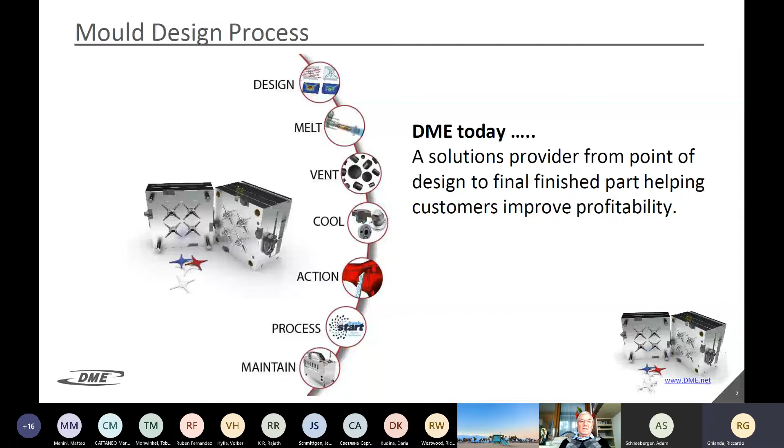So first of all, DME today, who are we? We are a solutions provider whose goal is to accompany the customer all throughout the production process. We start by helping the customer in the design phase, then through the production and assembly of the mold, and mainly thanks to this machine that I will talk to you about at the end, we are also together with our customers during production and during maintenance of the molds.

So why is cooling an opportunity? Why do we think it is such an important opportunity? It is because the cooling stage, as you can see in the diagram here, is the most important and the longest portion of the production process. In this diagram, you can see it can be up to 50% of the total cycle time, sometimes even more. This means that any improvement on this part of the process can have a major impact on the overall production output.

How can we generate an improvement in the output? It can be thanks to an improvement in the cooling stage, in the production of the cooling lines, ending up in a reduction of the part weight or a reduction of the scrap rates, which generally means a higher quality of the part, because the level of performance in cooling has a direct impact on the quality of the plastic part. Or it can save time.

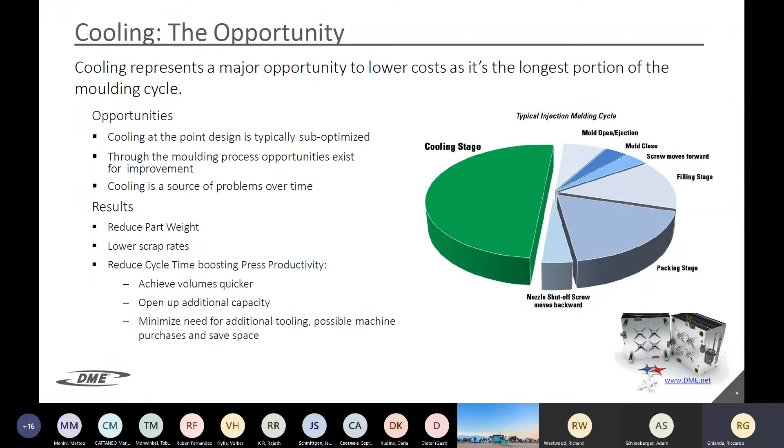So you can either achieve volumes quicker, saving more time, which ends up in higher productivity. You can open up additional capacity, because that time you save can be dedicated to other productions, which is vital for injection molders. And you can have a reduced need for additional tooling, because to get to the same production level you need less tooling—maybe just one mold, or two molds instead of three, for example.

What is the DME approach? We want to help the customer at the design phase, and here we can help with our engineering, with our support to customers. You see mention here of analysis, because we can help customers with mold flow analysis. We can offer this service, and then thanks to our cooling technology.

Here is basically our products: the standard components, performance baffles, conformal cooling—just three examples. But then we can also help the customer once the mold is produced and in production, thanks to products like SmartFlow and Tracer VM to control the production, thanks to Cooling Care for the best performance and maintenance of the mold, and other products for control like the M-series controller.

As all of us know here on the call, DME is a sister company of Mold-Masters, so we can also sell their controller. This is not going to be in the discussion today, but it was just to give an overview of what we can offer.

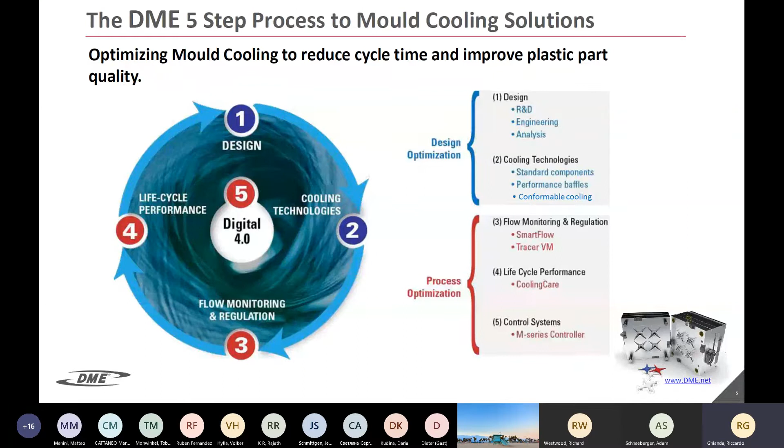So now we go into the products, the complete overview of our solutions. First of all, a lot of pictures—this is exactly the biggest, or easiest, part of our offering: the sockets, the plugs, the nipples, the extension hoses, and the rings. So the easiest products that we have when it comes to cooling.

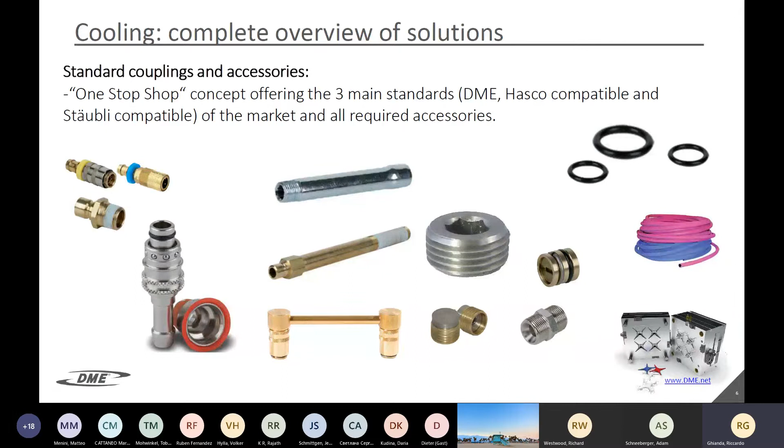What is important about DME is that we are a one-stop shop, because customers can find with us the 3 main standards on the market in Europe, and I would say globally. The main one is the DME standard, our own original accessories. Then we have 2 other families: what we call the Euro, which is Hasco compatible, and Universal, which is Staubli compatible. So basically, a customer can find with us any of the products he might need to build the mold.

Then the second family is the baffles and cascades. These are a little more sophisticated products.

Their goal is to bring the cooling as close as possible to the cavity, still using conventional machining. And I'm saying this as opposed to 3D printing, okay? So still with conventional machining, the customer can bring the cooling as close as possible to the cavity.

We have a wide selection of baffles and cascades, I really think the widest in the industry. Here I summarized with all these pictures how many we have. And because we have so many, we can offer customers ease of installation, because they can choose between all these different options on how to install the baffles or the cascades in the mold.

Then probably the most efficient product is the one on the right, because it has built-in ribs. When the water is flowing on one side of these baffles, it generates a turbulent flow, which means in the end a higher efficiency in cooling. This is very important because of the topic we're talking about today.

And then, because we have so many different products, we can offer customers different inlet and outlet configurations, which results in the end in a higher freedom that we give to the designer when he's still designing the mold. And then the last topic is about the product you can see at the bottom left, which is a modular version. Basically here the customer can put together as many pieces as he needs to suit precisely his application, according to the length that he needs.

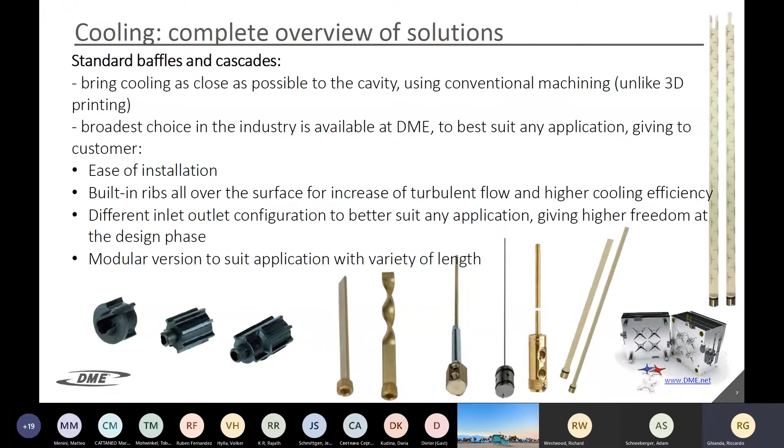Then other very successful products that we have at DME are the standard heat transfer rods. All of these are, of course, standard products. And these bring the cooling efficiency even farther, because you can go even closer to the cavity with this kind of product, and you can reach really the hardest spots. And again, I'm talking about conventional machining. Of course, with 3D printing, you can go beyond, but with conventional machining, this is the top that you can get. They are easy to install, because as you can see, they're all cylinders.

And what's most important about this product is that they have a higher thermal conductivity than copper. So you can go very close to the cavity and bring the highest efficiency in cooling which is possible with standard products.

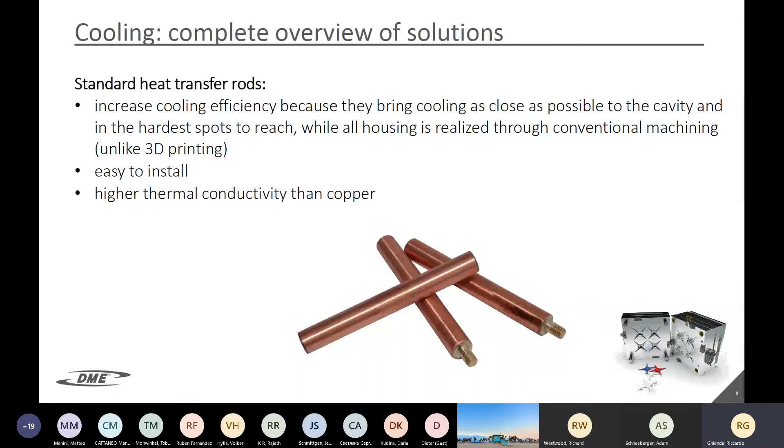Then here we have another important product for us. I put together multi-couplings and the cooling manifold, even though they're different products, because in the end they are both needed to reduce the time dedicated to operations such as the connection and disassembling of the mold when it is going in and out of production. So these products give customers the possibility to save time in all the operations before and after production.

The multi-coupling which you can see at the center is the DME version, so the original DME standard, and the one on the left is the Staubli compatible. Then on the right, you have our cooling manifold. In this case, this is a special product, which we design every time according to the request of the customer, according to which threads and which length he needs. But this picture also represents a range of standard products that we have, like anyone on the market.

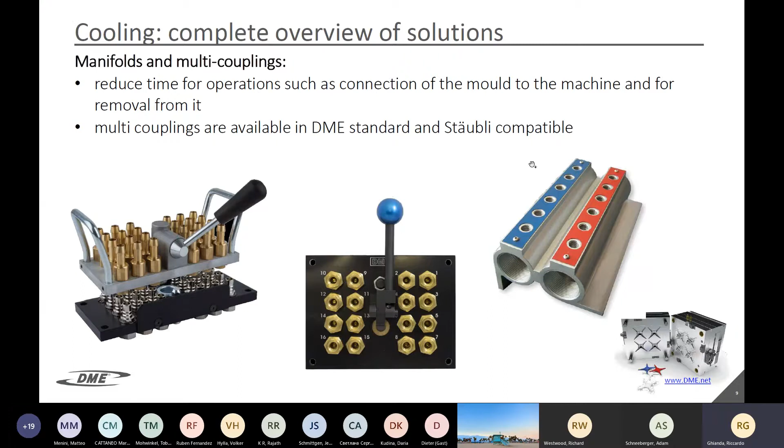Probably the jewel of the crown, when it comes to cooling, is conformal cooling. In this case, as DME, we already had a session. I think most of us participated already on Tuesday, the 20th of October, so this Tuesday. And as Adam was mentioning before, you can find the recording on our LinkedIn page.

I just want to mention to our customers that together with conformal cooling, we can also offer, of course, mold flow analysis, whether it's for an opportunity related to conformal cooling to be installed in a mold or not. So even for conventional cooling, we can manage it.

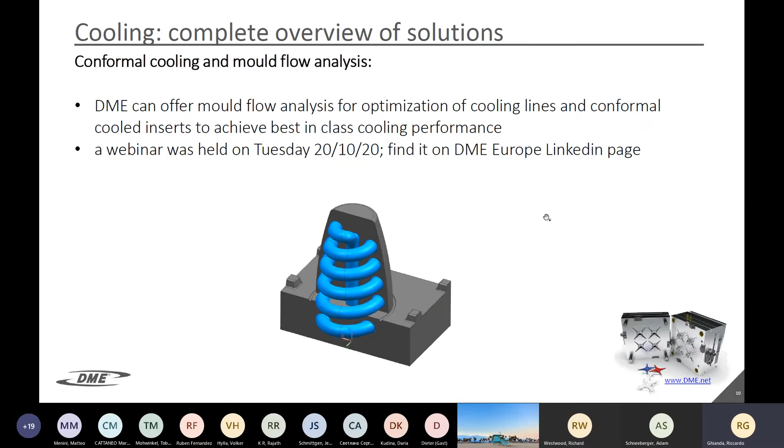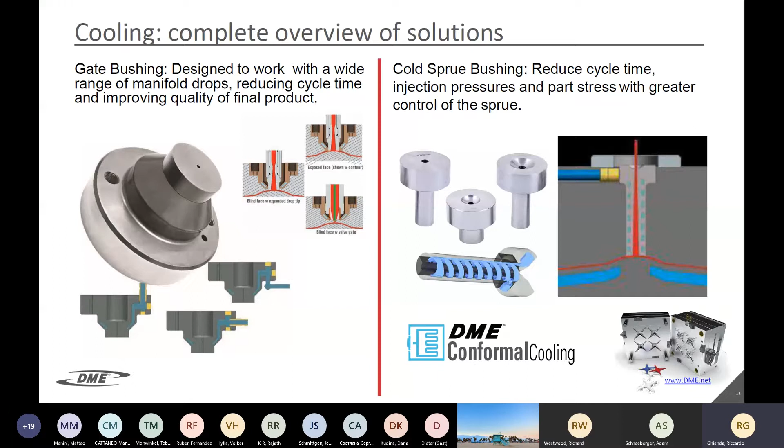So this brings to the customer in the end a reduction of the cycle time and a reduction of the injection pressures, which is very important because it enables many possibilities for the customer, like, for example, depending on the dimension of the mold, even working on a smaller machine, if possible, which means in the end a cost saving, a reduction of the cost for production. And the same products can also bring a reduction of the stress within the plastic part, so in the end, a higher quality of the final product.

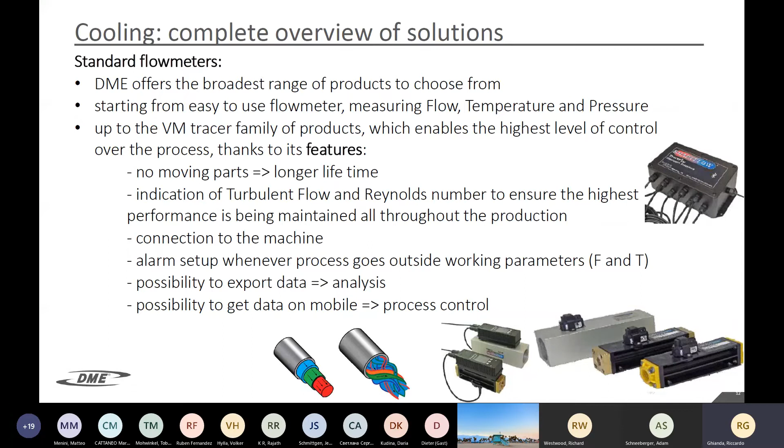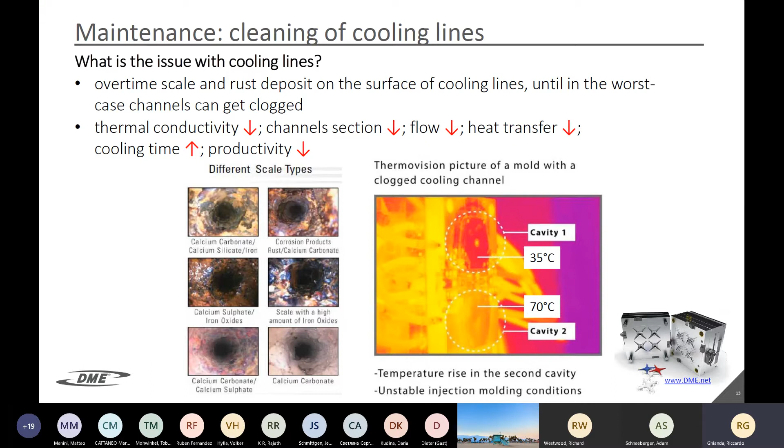As the sum of these 2 effects, the reduction of the section and the thermal conductivity, you have an overall reduction of the heat transfer, which means that to obtain the same level of quality on the part, to be able to eject the plastic part from the mold, you have to use a longer cooling time, which in the end results in a lower productivity. So this is the issue that injection molders are facing.

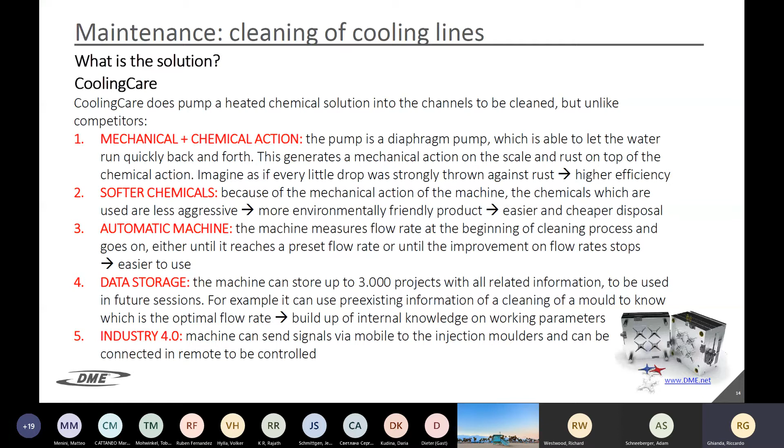And then the last point is about Industry 4.0, which is of course very important and the trend of the moment, because the machine can be linked to the internal system of the customer's injection plant, in order to download all of the data onto the PC, or also via mobile. It can work via mobile because it has a GSM card installed in the machine. So this is why the Cooling Care is so important for us. And then just a few notes about it, because anyway, it's a machine.

DME is available for demonstration, so we can show the customer how the machine works and how efficient it is. And of course, we provide training. Once the machine is sold to the customer, we provide training on site. On the other hand, if a customer for any reason doesn't want to buy the machine, we can also offer in-house cleaning. In this case, a customer can send us a mold or an insert, anything that needs to be cleaned, and we can do it in-house.

As a reference, because normally this is a question everyone would ask, the process takes 6 to 15 hours. Of course, it depends a lot on the condition of the cooling lines, because maybe a customer is doing maintenance after just 3 months, or maybe the mold has been running for, I wouldn't say years, but a long, long time without maintenance. Of course, you have different conditions. Therefore, you have this long range in the duration of the process.

But normally our demos are very effective, because what we see most of the time is an increase in the flow rate by two digits. So I'm talking 20, 30, 50%. In some cases, probably where we started with the molds in the worst condition, we also had a three-digit percentage increase. Once I saw about 200% increase in flow rate. This means at the beginning the channel was almost closed, and then it was back to normal conditions.

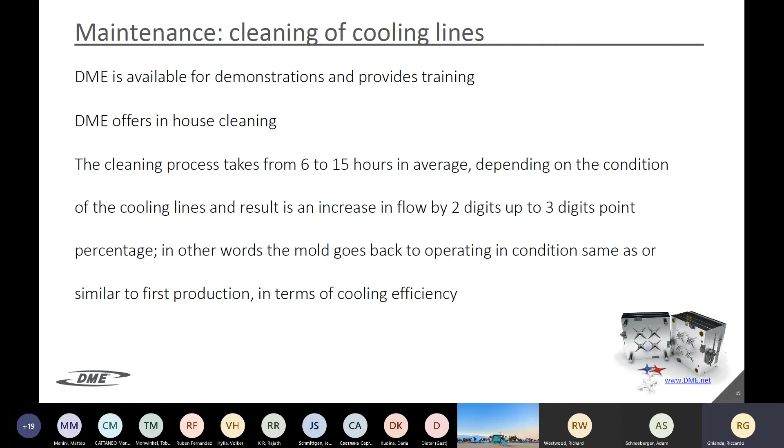So this is everything for the presentation of today. I tried to keep it short. I see it's almost half an hour, because then we have time for any question.